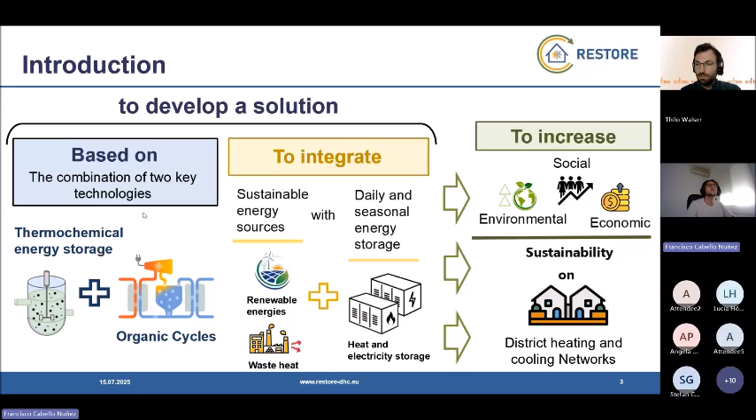So considering that, what we define in our project first of all is what we call the overall concept. This overall concept, as we will see later, encompasses several potential applications. Here on the screen, you can see the main blocks: organic cycles, and the thermochemical energy storage.

As I mentioned, it's suitable for different applications, so we can take into account different energy sources that can be harnessed by our system, but our system can also provide energy to cover services to different users.

Here in the energy sources, we classify them into three main groups: the high temperature heat group, which includes technologies like high temperature geothermal or concentrated solar, also high temperature waste heat. Then we have the green group, which is the electricity technologies, producing electricity as PV or wind energy. Finally, we have the medium temperature group, suitable for solar flat collectors, geothermal energy, or low temperature waste heat.

All these systems can provide energy, and we use heat pumps that adapt the energy input, electricity, and medium temperature heat to the conditions required by the thermochemical energy storage. Also, in the case that we have high temperature heat suitable for application, we can directly integrate it into a thermochemical reactor.

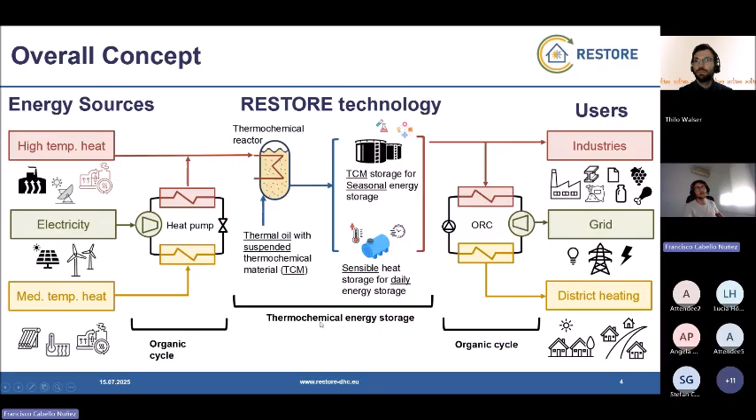So as I mentioned at the beginning, we can identify two main innovative components: one is the organic cycles, and the other one is the thermochemical energy storage. Let's take a look in detail at these components.

Concerning thermochemical storage, the system is based on a reversible reaction, where in the charging phase we apply heat to component A and produce component B and component C. When we want to discharge the system, we recombine these components and have an exothermic reaction where we release some heat.

The idea is that in our concept, we consider a reactor that works with oil and solids in suspension, which we call the thermochemical material, identified here as A or B. To start the process, we have a flow rich in oil, and we mix it in a mixer with product A.

We flow this, it's first preheated, and then used in the reactor. In the reactor, we provide some heat from the heat pump, and we have the thermochemical reaction where we release product C, which in our case is water.

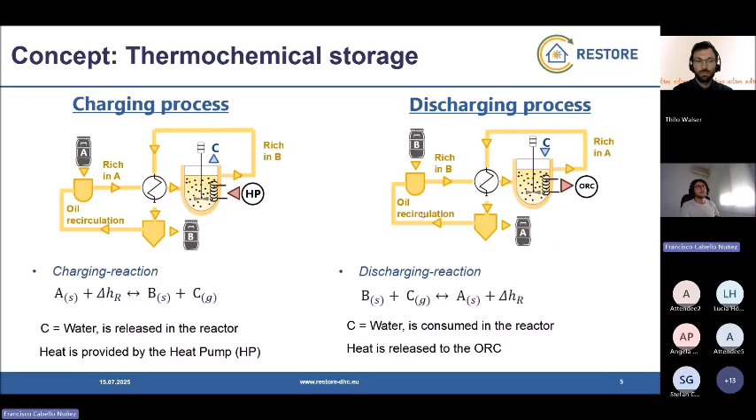Concerning the organic cycles, we also introduce an innovation in that part. The first thing to mention is that we differentiate between two different products. The first one is a small scale system that is based on a fully reversible machine.

When I say fully reversible machine, I mean a machine that is able to operate in charge mode as a heat pump, and when we want to discharge the system, we change the operation mode and the same machine can produce electricity and work as an organic Rankine cycle. This fully reversible machine is based on the use of a screw machine that works as an expander and as a compressor, depending if we are in charging or discharging mode.

Here we define a product around a maximum power input of 200 kilowatts electrical. This solution is expected to be modular, so in the case we have a limitation of maximum power, we can stack several modules to increase the capacity of the final system.

This solution is also suitable for when there is a requirement of compactness, because for example the system must be integrated in a building or similar applications. We can make the modules more compact in case, for example, we base our solution on heat exchangers such as plate heat exchangers.

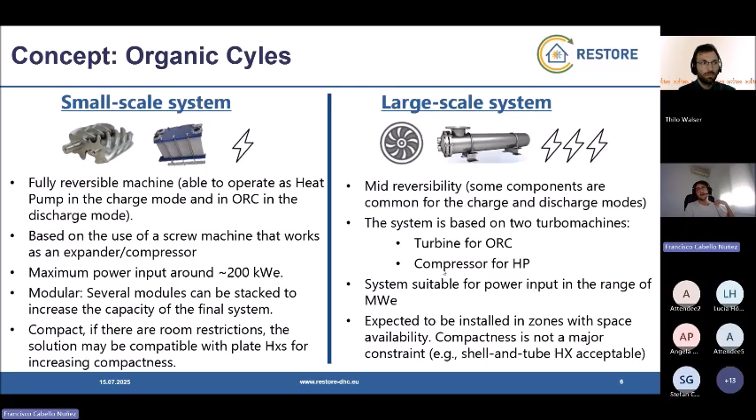So this is very briefly a general overview about the concept. Let me give you some advantages of using this kind of system for storing energy.

The first advantage is that, in difference with other systems like batteries or other energy storage services, we can provide and store energy in both forms, electricity and heat. This is a great advantage as it allows us to integrate different clean energy sources, for example waste heat, but also electrical and thermal renewable technologies.

The second point is related to the previous slide: our concept is highly scalable. For example, in the range of small applications we can use our modular product that can be stacked in different modules in case we need to increase capacity, and in case we need very large scale applications, we can move to the other concept, which can be applied to larger plants or industries with high consumption.

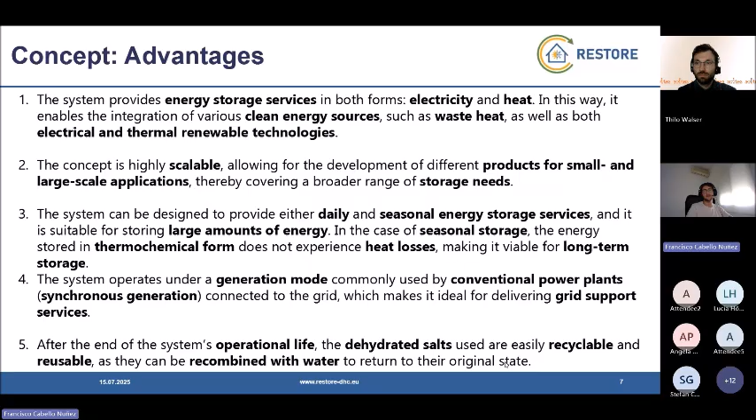And the final point to be remarked, especially when we talk about seasonal energy storage applications where we need a lot of material, is that the material we are focused on as a thermochemical material, when we reach the end of the system's operational life, these salts, these TCMs, that are dehydrated salts, are easily recyclable and reusable. When they are recombined with water, they return to their original state. So we can even think of reselling this solution in the market.

As I mentioned before, there are a lot of options in our framework to connect the RESTORE system, considering different energy sources and different users, but I will try to give you a general overview of the main applications of this system. Here I define 4 important groups. The first one related to the decarbonization of the industrial sector, then the provision of grid stability and ancillary services, the enhancement of the dispatchability of renewable energy sources, and finally thermal energy supply for residential consumers. Let's see in detail some of these main applications.

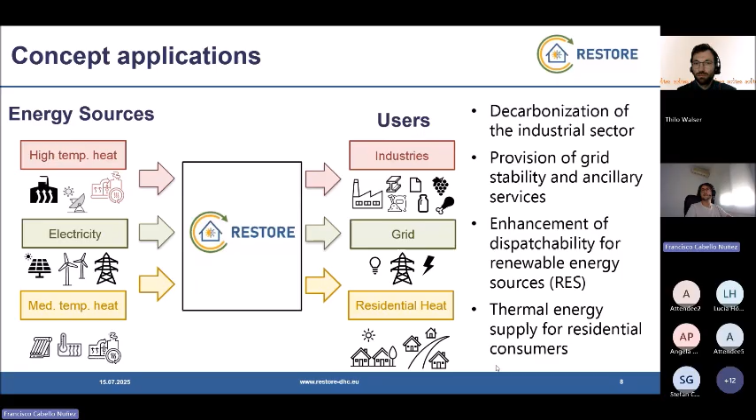First, for the decarbonization of industry, we identify 2 main groups. The first group is the industrial sector that works with higher temperatures, and in that case, RESTORE will be directly connected if we have industrial waste heat at a high enough temperature to run our thermochemical energy storage. And when we want to discharge the system, we can provide high temperature heat for the industry, or, which we mark as optional, if there is district heating close to the industry or we intend to produce electricity, we can also add the Organic Rankine Cycle of RESTORE to produce some electricity or some heat that is provided to the district heating.

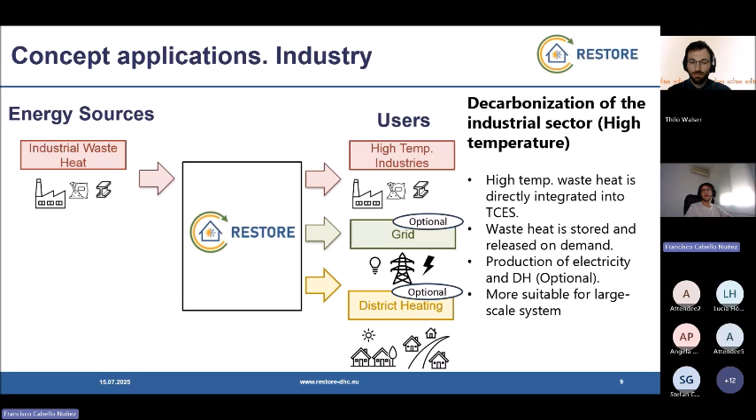And for this solution, considering that high temperature industries normally have high capacities, high thermal output and high thermal energy input, we consider the large-scale RESTORE system more suitable for this application.

The other group related to the decarbonization of the industrial sector are industries that work with medium temperature. In that case, if the industrial waste heat is at lower temperatures, we will need the heat pump, which consumes some electricity. So our heat pump will exploit the industrial waste heat and also some electricity, either from the grid or from a renewable energy technology that matches quite well with the profile of the industrial waste heat. That way we can reduce the buffers and increase the competitiveness of our system.

And we store the energy, and when the energy is demanded, we can deliver it either as high temperature heat for the industry directly, or, as in the previous case, we have the optional case of producing some electricity and some heat for residential applications. In that case, we also consider the large-scale system more suitable, as industry normally works with higher capacities.

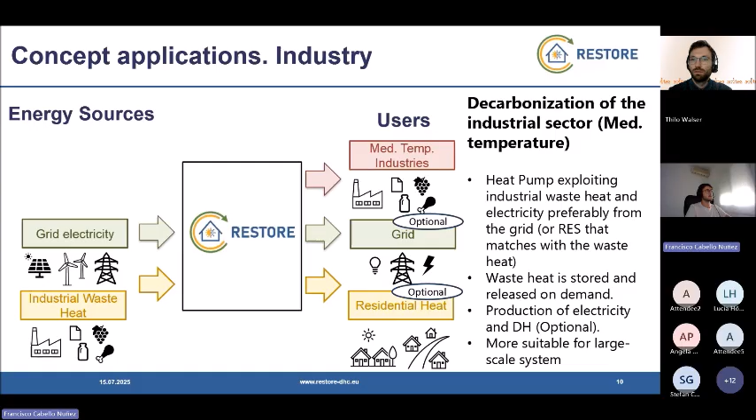The next application is supporting the grid to provide stability and ancillary services. In that case, the RESTORE technology is directly connected to the grid. We use the heat pump to consume electricity when the grid is in a period of high production and low demand, and we store this excess energy. To run the heat pump we couple it to a medium temperature renewable technology, such as solar, which matches quite well with the periods of excess energy on the grid, because solar thermal energy matches quite well with PV, which is normally what saturates the electricity grid.

But here we can also include, for example, geothermal energy, which has a flat production, and in that case we can exploit the RESTORE heat pump when it's necessary for the grid. When there is a period of high demand and low production, we can discharge our system to provide as much electricity as possible. This solution can be suitable for both large-scale storage and small-scale modules, depending on the grid energy needs and the specific locations. This is something that the grid must define.

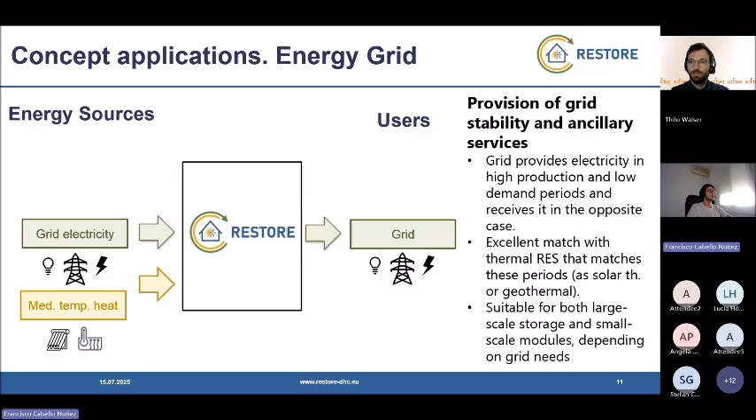In case they need large capacities, we can go to the solution based on turbomachinery. In the case they only need small modules to increase the stability of the grid, we can use the modular solution. Quite related with the previous one, but in that case, the Restore solution can be directly connected with the renewable energy source that produces electricity.

In that case, the Restore system is not connected to the grid, it is directly connected to the renewable energy plant. And in that case, it's quite important to have a good match between the technology that provides electricity and the technology that provides heat. For example, in the case we want to provide dispatchability to a PV plant, an excellent combination could be the solar flat collectors that also harness the global irradiation. And in that case, both technologies have a matching production.

Or we can use wind energy combined with geothermal. In that way, we can avoid excess of electricity and avoid curtailments of this type of plants. And we will store the energy during high production periods and then deliver it when the demand is quite high. Also in that solution, we have the optional case of producing only electricity, or also providing heat services to district heating or small buildings, depending on the case.

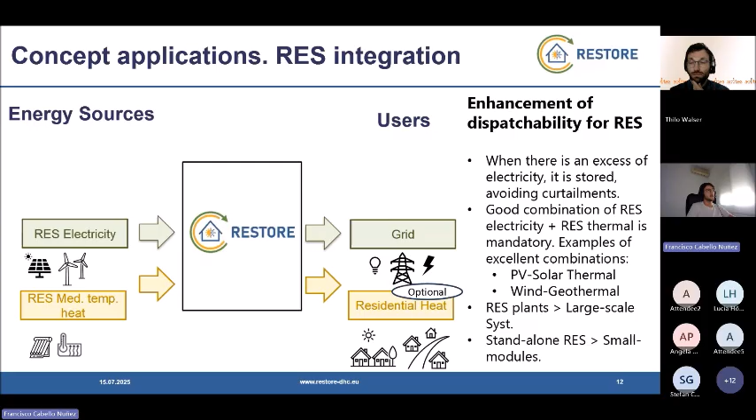As for this case, both the large scale system and the small modules are suitable depending on what we have in mind. If we have in mind large plants, we must base our solution on the large scale system. But if we have in mind standalone solutions that are not connected to the grid, and we want to operate it as a standalone system, we can connect our small modules.

And the final application is focused on providing mainly heat to buildings. In that case, we are talking about the small scale modular solution, and we will allow, for example, buildings to reach zero emission or close to zero emission based on the use of our Restore solution. So for example, in this kind of building, we can connect our modules to exploit some electricity produced by PV, and also harness the medium temperature heat from solar flat collectors.

Or if the building is, for example, a university and it counts on a data center that has waste heat, this can also be harnessed by our system. We store the energy when we have an excess, and then we produce mainly thermal energy for the building consumption, but also some electricity production that could cover part of the electrical building consumption.

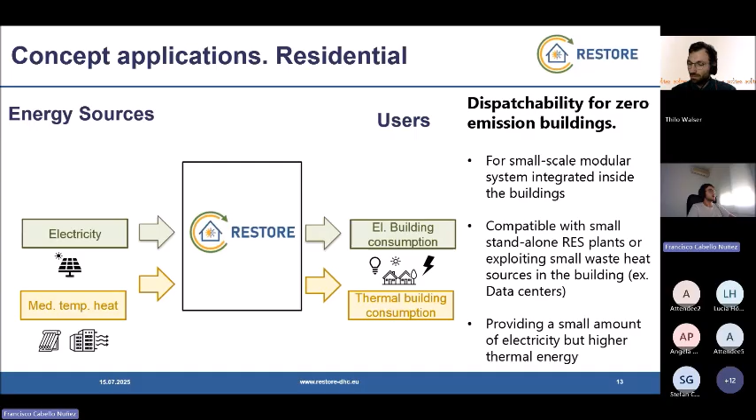And I think that's all from my side. I hope to have given you a general overview of the concept and some details of potential applications. At the end of the session, I will be glad to answer your questions. So thank you very much for your attention.

Yeah, thank you, Francisco, for your presentation. It's very interesting and shows well the different applications of Restore. So we will now continue with the next presentation. It will be about the social sustainability assessment of Restore, presented by Angela Hahn from the Prospex Institute.

Angela has studied social work in her bachelor and intercultural conflict management in her master. At Prospex Institute, she's responsible for coordinating international research and innovation projects, and her expertise lies in the social dimensions of sustainable natural resource management. She's particularly focused on qualitative research methods and stakeholder engagement. So happy to have you here, Angela, and the stage is yours.

Thank you very much, Thilo, for the introduction and for the invitation to present the social sustainability assessment today. Let me quickly share my screen. Good afternoon, everybody, and welcome to the presentation of the Restore Social Sustainability Assessment. I will give the presentation on behalf of my team at the Prospex Institute. We are mainly responsible in the Restore project for the stakeholder engagement part, and one of our tasks is also to work on the social sustainability assessment.

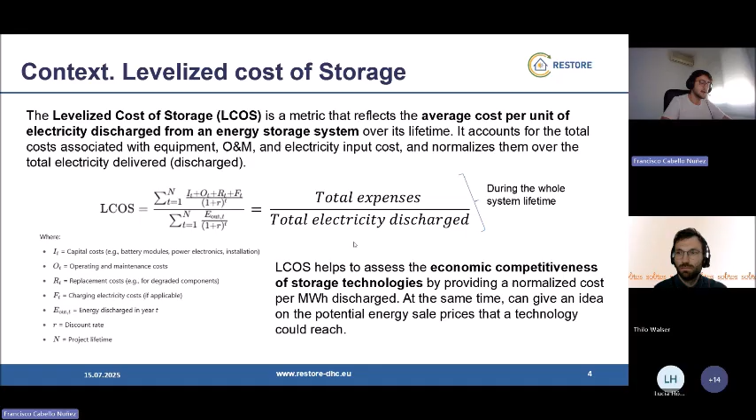But there is a particularity of Restore that must be remarked. If we recall the previously described concept, the Restore system not only consumes energy in one form, electricity or heat, it consumes energy in both forms, electricity and also heat. And at the same time, it is able to deliver energy in both forms, as electricity or as heat. So this particularity has to be kept in mind for this analysis.

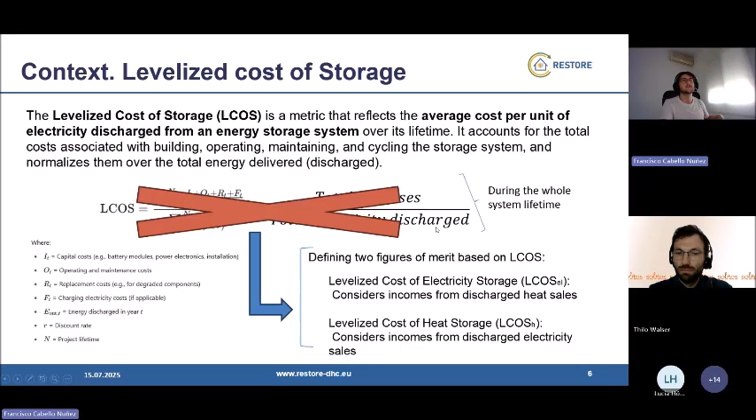So coming back to the previous slide, in our case we are not focused on the levelized cost of storage. We are focused on two different figures of merit. On the one hand, we define the levelized cost of electricity storage for our system, and for this calculation we consider that we obtain some incomes from the sales of the discharged heat. And when we want to estimate the levelized cost of heat storage for our system, we consider incomes from the discharged electricity sales. In that way, we define these two figures of merit for our system, considering its particularities.

So what's the methodology that we follow? First, we are focused on the definition of the CapEx, the investment cost. For the estimation of the CapEx, we have defined correlations based on literature and also on the feedback of the industrial partners to estimate the cost of the main components of the Restore solution. For example, here we have a correlation associated with the non-reversible organic turbine, and we calculate a base cost, and depending on the correlation, we update this cost considering the CEPCI index.

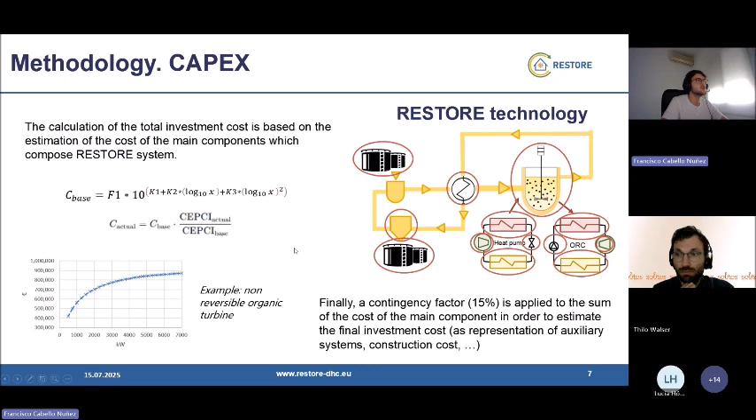We use this procedure to estimate the cost of the main components of the system: the storage tanks, the heat exchangers, the reactor, the turbine, heat exchangers of the organic cycle, and so on. And in the end, we have a summary of the cost of the main components of Restore. Finally, as a simplification, we consider a contingency factor of 15% applied to the sum of all these main component costs to estimate the final investment, representing auxiliary systems such as the control system or sensors, piping, and also costs associated with construction. With this simplification, we increase the cost slightly to take these concepts into account.

So once the CapEx is defined, we move to the second part of the financial model, which calculates the cash flow for each year over the plant life, which is estimated at around 15 years for our first evaluation.

Once these cash flows are estimated in a model implemented in Excel, the model concludes the relevant economic indicators: the net present value, the internal rate of return, and finally our main outcome of interest, the levelized cost of storage for electricity and for heat.

Here I bring also some considerations taken into account in our model. I won't go very deep into details since we are tight on time, but just to mention that for the inflation rate, our system allows us to consider a variable inflation rate, but in our first cases we consider it constant. It also allows us to consider degradation of the plant, assuming that the percentage of energy produced in the last years of the plant is lower. So we are able to modify this kind of parameter. For our first estimation, we consider low degradation.

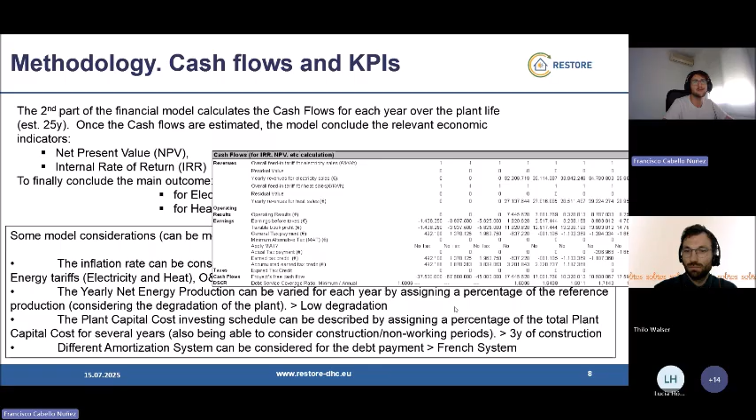And then we can also choose the amortization system, and in our case we have chosen the French system. Well, we have our Excel that is plenty of rows and columns, so I'm not going to go into detail with the Excel. Just to mention that the procedure we follow is the next one.

In the Restore project we have the IPSEGO platform, a simulation tool where we implement the use cases previously mentioned. In these cases, we conclude the energy balances and the size of the different equipment. So we integrate into different datasheets in this tool the correlation I mentioned before in order to calculate the cost of the different components, and then this information is used in the Excel tool I mentioned before.

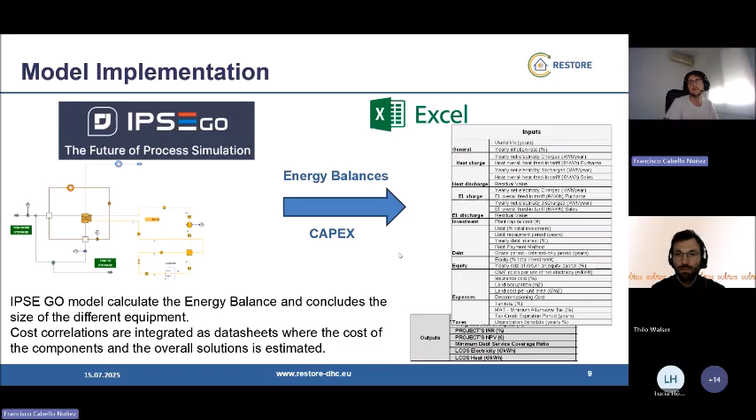So we analyze and receive the energy balances, which mainly means electricity consumed, electricity produced, heat consumed and heat produced, and also the investment cost. Finally, our Excel concludes with the levelized cost of storage and levelized cost of heat, and also other ratios such as the internal rate of return and the net present value.

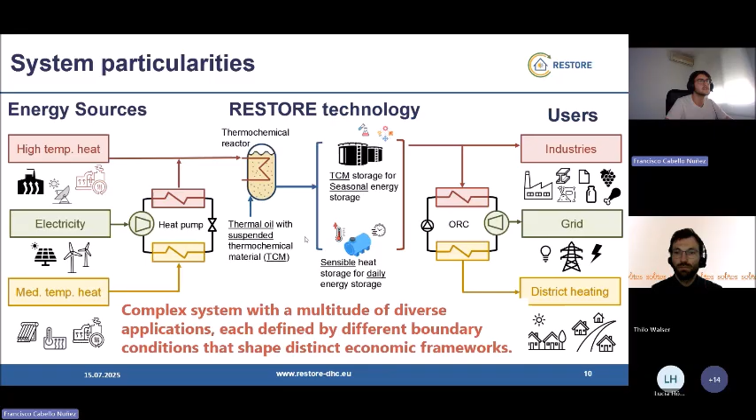But considering that we have developed this model, it's important to mention that, as we've seen in the first session of this webinar, the Restore system is quite complex with a multitude of diverse applications, and each application sets different boundary conditions that shape totally distinct economic frameworks. It's not easy to deal with that. So what's our approach in the Restore project? Well, in the Restore project, we define virtual use cases, already mentioned, that are, at the end, a virtual implementation of the Restore project concept for specific gas facilities over Europe.

In these use cases, we apply this economic assessment, concluding economic data such as the investment cost, the annual cost, the cash flows, and finally the levelized cost of storage for heat and electricity. There are 6 different use cases considered in the Restore project. You can check all the information on the use cases on our website, but mainly they consider different sizes, different energy sources, and different users.

So with these 6 different use cases, we expect to have different scenarios to conclude the competitiveness of Restore in different applications. But unfortunately, the information on these use cases is not ready yet; it's not finished. We are still dealing with simulations, so this economic assessment cannot be applied yet.

But for this presentation, and to try to give you some numbers, we have defined a general case and have some preliminary conclusions and preliminary results related to the economic assessment. So I want to bring that here.

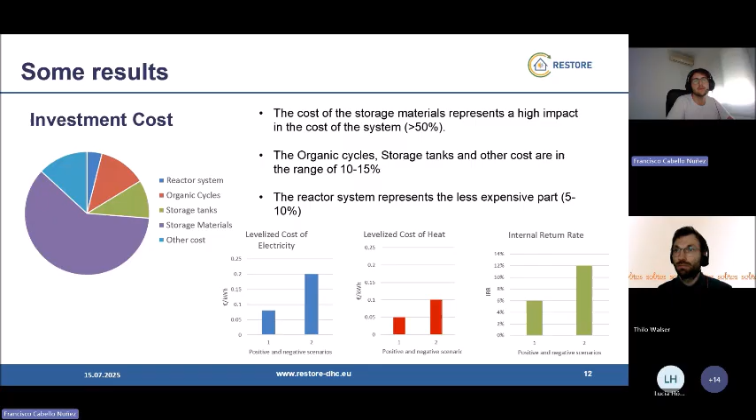To bring some conclusion to this presentation, I'll summarize quickly since we are out of time. An extensive economic model has been adapted and implemented to estimate the main economic indicators, and that's quite good because now we have the tool to estimate different scenarios.

It's also important to mention that these first results show the relevance of the cost of the storage material in the economic assessment, and this variable represents a high impact on the final results. So these values must be considered and taken into account carefully. A potential reduction in the cost of the storage material will improve profitability and maximize the competitiveness of the final Restore system.

The next steps are to carry out the economic analysis for the 6 different use cases. I invite you to keep tuned for information when we finish evaluating these 6 use cases, and also for the final outcomes confirmed by project completion. I hope I've given you some details on what we're working on, along with some very preliminary conclusions and a general overview of the economic assessment.

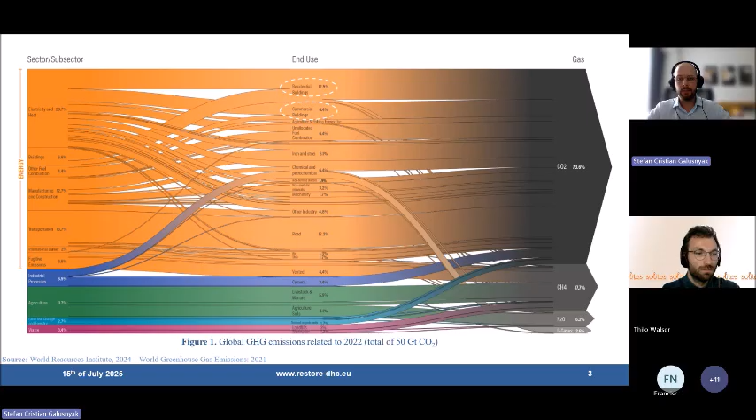Regarding the LCA methodology, life cycle assessment consists of 4 distinct stages according to the International Organization for Standardization. First, we have the goal and scope definition. Next would be the life cycle inventory step. Third, we have the life cycle impact assessment. And last but not least, we have the interpretation of the results.

Regarding the goal and scope definition, at this stage it is important to state what is the goal and scope of the intended study. Then we move and we have to state what is the function of the investigated system. For example, the function of the system could be to generate electric and thermal power. Next would be the definition of the functional unit. The functional unit serves as a reference both for the input and output streams, and it is also used to easily compare different processes or different products.

Finally, we have to define the system boundaries. Here we have to clearly state which are those processes that we take into account when performing such an LCA study. Depending on which processes we consider, our study may be classified either as cradle to grave, if we take into account processes from raw materials extraction, materials manufacturing, the main production process, its use stage, and also its end-of-life treatment. However, if we go from cradle to gate, that means we should take into account processes from raw materials extraction, materials manufacturing, and the main production process. Another option would be to go from gate to grave, so it means that we only take into account the use phase and the disposal, the end-of-life treatment. Or we may focus on a gate-to-gate evaluation, which means that we only look at the main production process.

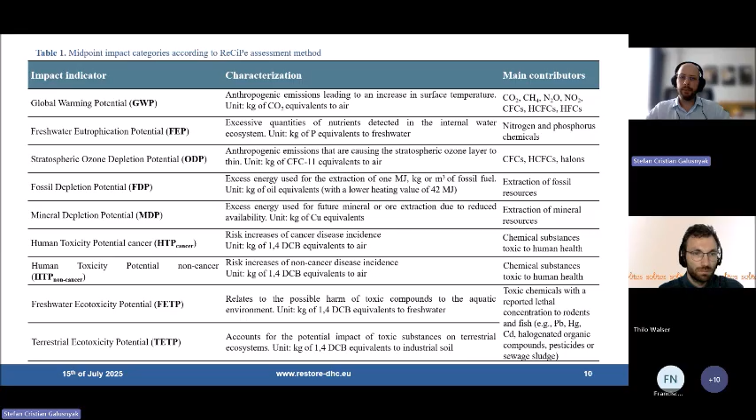Here we have a description of several midpoint impact categories and the main impact contributors in each case. We have the global warming potential, which is characterized by anthropogenic emissions leading to an increase in surface temperature. As main contributors, we have carbon dioxide, methane, chlorofluorocarbons, and so on. I would also look to the human toxicity potential category, which is divided into human toxicity potential cancer and human toxicity potential non-cancer. Those two are characterized by risk increases of cancer and non-cancer, respectively. As main contributors, we have chemical substances toxic to human health.

Okay, so that was all I have prepared about the methodology. Now let's take a look at the RESTORE prototype.

First of all, this study is a cradle-to-grave LCA analysis, as we took into consideration raw material supply up to the main charging and discharging processes, and we went downstream for waste disposal.

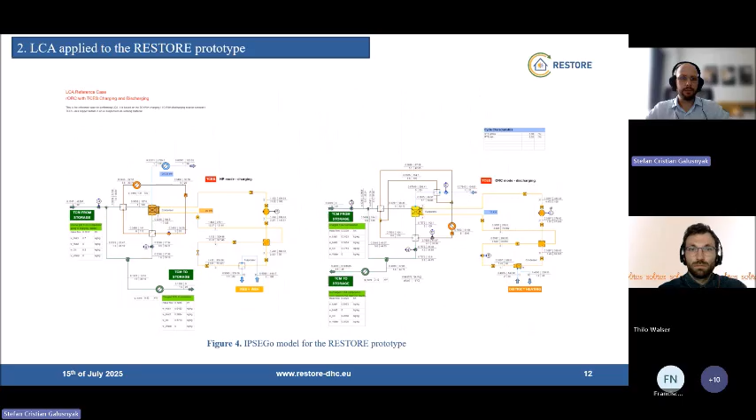Afterwards, we have the inputs and the outputs. We should carefully select the streams when defining the input and output streams, as they might significantly influence the outcome of the analysis.

One very important aspect regarding the RESTORE prototype, and I'm going to emphasize this later, is the LCA plan for the RESTORE prototype construction.

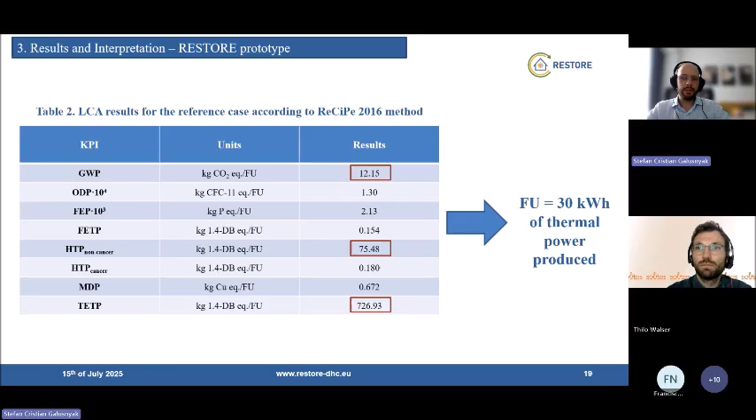As can be seen, the largest impact scores are registered in terms of global warming potential, human toxicity potential non-cancer, and also terrestrial ecotoxicity potential. In the next slides, I would like to take a look at those three impact categories.

So in terms of GWP distribution for the overall system, we may see that the oil production, so the charging system, has a contribution of 9.51 kilograms of CO2 equivalents, while the Novec production contributes 5.42.

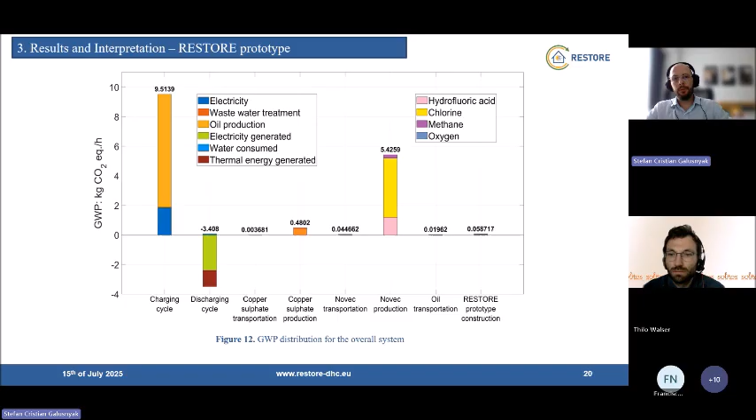Now, if we take a closer look at those two subsystems, we may see that the oil production has the largest contribution in the charging cycle. The discharging cycle exhibits a negative impact due to the electricity and thermal power generated, while for the Novec 649 production, we can see that chlorine exhibits the largest impact.

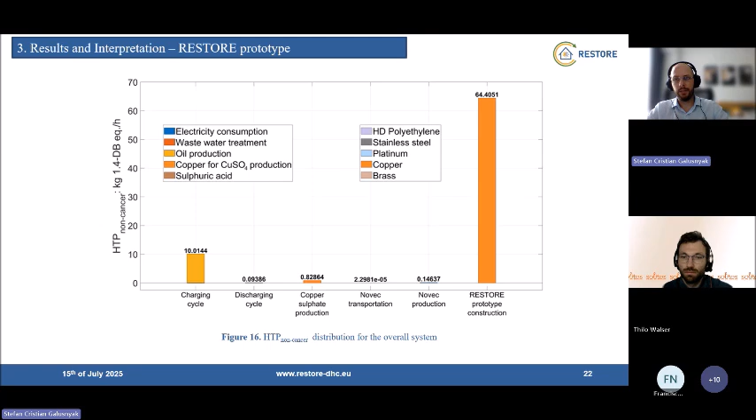Same when looking at the human toxicity potential non-cancer distribution: one can see that the largest impact comes from the RESTORE prototype construction, followed once again by the oil supply chain.

Going into further detail, it can be noticed that copper production exhibits the largest influence when referring to RESTORE prototype construction.

However, it is important to state that it's not the RESTORE technology itself. It is more related to how copper is produced, since we use copper for wires and so on. So it's not the RESTORE technology itself, it is more about how copper is produced, how you produce stainless steel, and so on.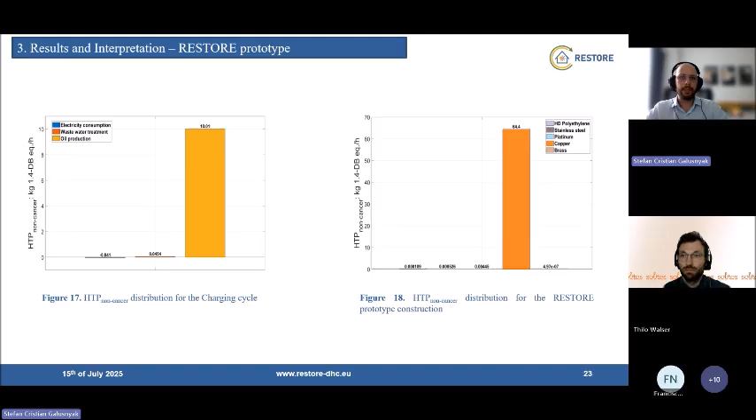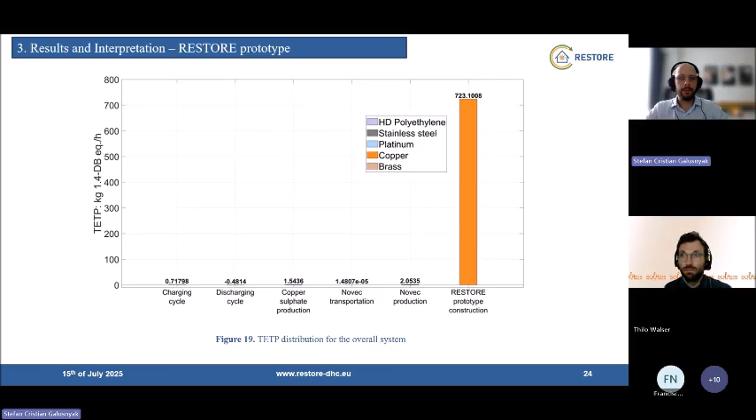Okay, same thing when looking at the terrestrial ecotoxicity potential distribution for the overall system. We can see that the RESTORE prototype construction, thus the way we obtain copper, stainless steel, and so on, exhibits the largest impact. We have copper production once again for the RESTORE prototype construction, while when looking at the Novec 649 production, we may see that hydrofluoric acid, followed by chlorine, rank as the first and second contributors.

Now, to sum up, I would like to say that global warming potential, human toxicity potential non-cancer, and terrestrial ecotoxicity potential exhibit the largest environmental impact scores.

When looking at the charging cycle, the oil supply chain ranks first with over 80% of the total impact score. Therefore, any improvements in this direction would considerably lessen the environmental burden. About 85% of the human toxicity potential non-cancer impact may be attributed to how copper is produced.

This is because copper is further used for the Restore prototype construction, and the main construction-related risks are associated with the upstream production of the materials, copper, stainless steel, and so on. So it is not related to the Restore technology itself.

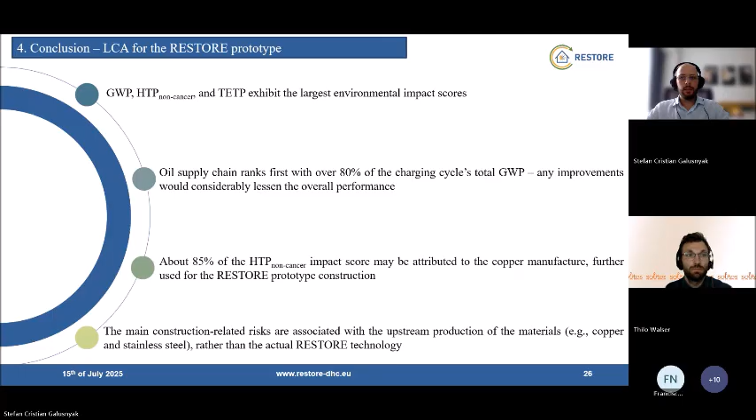Thank you, and I hope there are more things that you better understand now about LCA than at the start of this meeting.

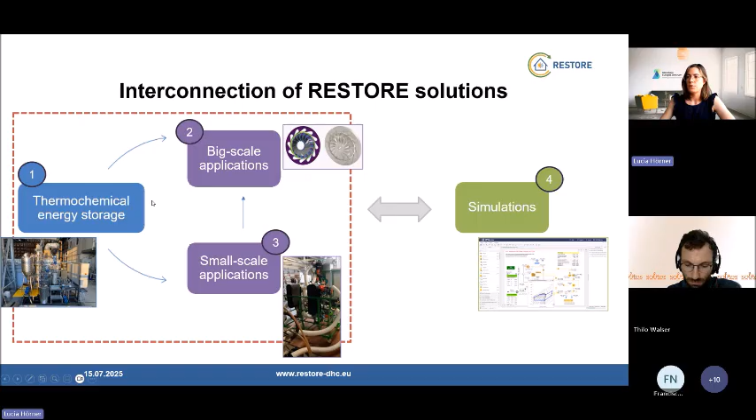So, the thermochemical energy storage design - I have here always the kind of value proposition that our solutions are offering, and they go hand in hand with the applications that were presented by Francisco earlier. I'll keep this introductory part short and focus more on the aspects that link to who will be customers, who will be key partners in this process. For this result, we are targeting energy-intensive industries, renewable energy producers, and utilities, grid and district heating and cooling network operators. What's quite special here is that we also see engineering, procurement, and construction companies, as well as energy service companies, somehow as entry points for reaching further customers and other partners relevant for the further development. Bringing this result closer to market will be heating, ventilation, and air conditioning equipment manufacturers, as well as manufacturers of energy storage systems.

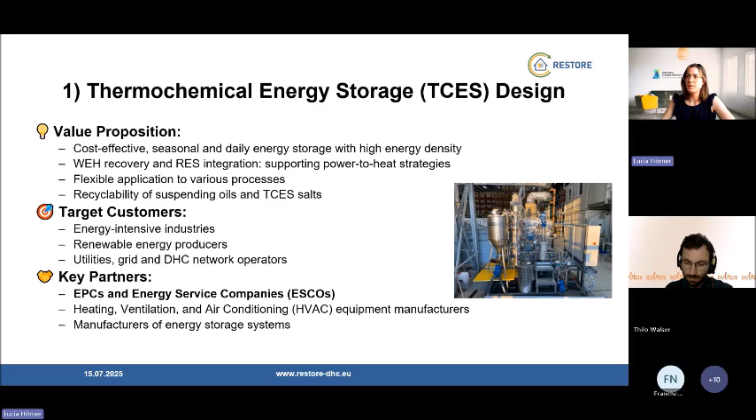Regarding the market size for this result, we are targeting the market of thermal energy storage, specifically the one for seasonal and long duration applications. This market has been projected to be at 4.3 billion euros 2 years ago, and is projected to be around 8 billion euros in 2030. However, it's quite difficult to get concrete data for the thermochemical energy storage market specifically, which is a share of this market. So the number I'm showing here is pretty much the market for 3 different types - thermochemical, sensible heat, and latent heat. It's a bit difficult to get concrete data.

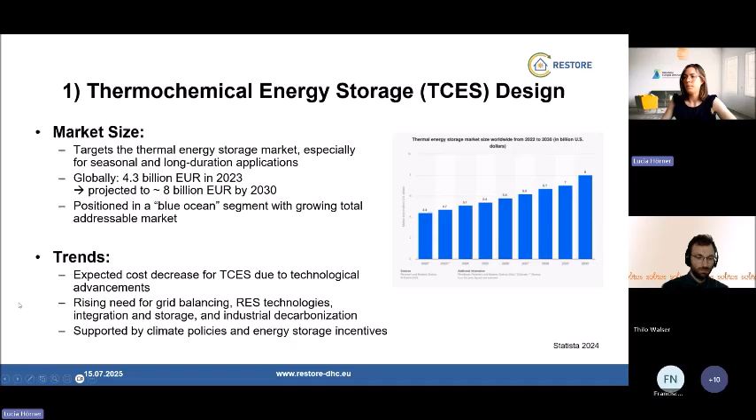But some studies suggest that the share for thermochemical energy storage among these 3 is the smallest. However, it's really continuously growing, and as we're expecting cost decreases for thermochemical energy storage due to technological advancements, this will for sure further drive the market increase. There's a rising need for grid balancing, renewable energy storage technologies, as well as integration and industrial decarbonization that, together with climate policies and energy storage incentives, is very strongly providing a case for our technologies that have been developed.

Then we have the large-scale reversible thermodynamic process. So this large-scale application is the most effective for really maximizing renewable energy and waste excess heat utilization. Here, target customers are district heating and cooling network operators and energy-intensive industries. And our key partners here are Turboden, who is a partner in this project, as well as district heating and cooling utility firms, industrial equipment manufacturers, and also technology integrators.

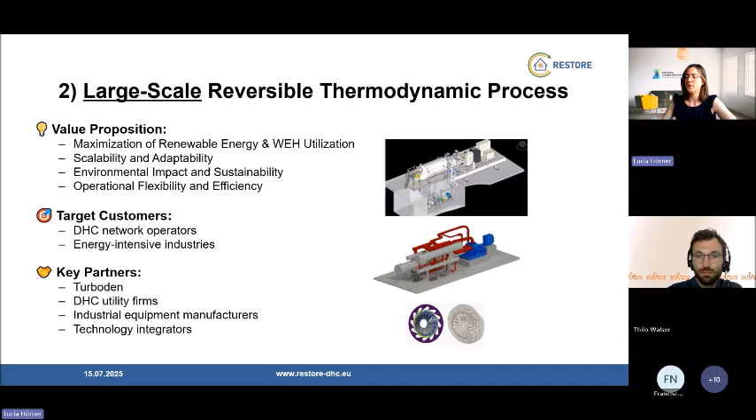What I can mention here is that it's quite adaptable and flexible. These are some terms that you'll also see for the small scale, as these are really value propositions that are not just linked to an individual result, but something coming up across all the various restore technologies.

In terms of market size, there's a large but immature market for decarbonizing district heating and energy-intensive industries. About 2/3 of the temperature demand is for district heating applications, while about 1/3 is for temperatures higher than 100 degrees centigrade. And this is relevant for industrial process heating.

We found some information that approximately 245 million tons of oil equivalent of waste excess heat is available for recovery in the EU. This is nearly equal to the EU's total energy demand for heat and hot water in residential and service sector buildings. So just to put this a bit into context.

And also here, the EU decarbonization policies, urban development, and sustainability goals are strongly driving the market for this type of application, and also the adoption of this technology. It's influenced by equipment costs, of course, energy prices, and the risk tolerance of the industrial sector.

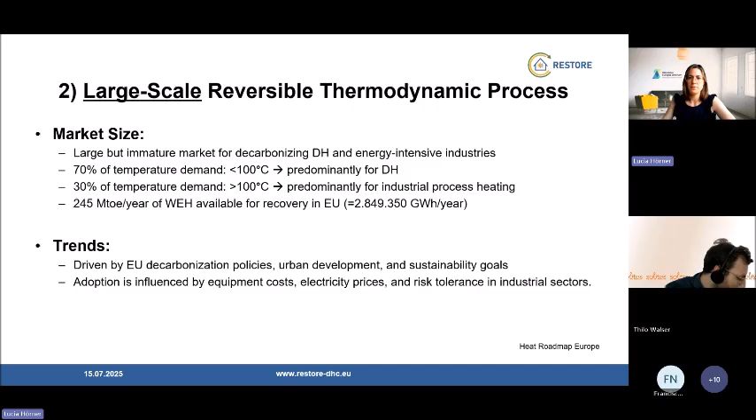Our small-scale application: here we're targeting educational and research institutions, local utilities, and small municipalities, as well as industrial parks and technology campuses. Our core partner here is Enerbasque, and other partners needed for the development and cooperation are academic and research institutions, local municipalities, and technology park managers. A strong buyer-supplier relationship is also important, as we're still developing the results together with the partners with whom we're cooperating.

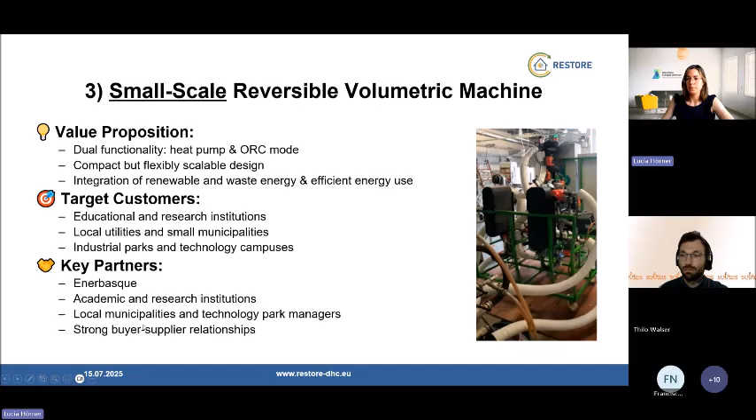So in terms of market for this result, we have about 1,500 higher education institutes with engineering programs in Europe, just below 400 technology centers, and cities of a size where this type of solution could be applied number around 60,000 in Europe. So this is the market for our small-scale application as we see it right now.

We have a rapid growth in renewable energy technologies, and also strong demand for flexible small-scale systems that can fit the needs of smaller towns, where the energy can then be managed locally.

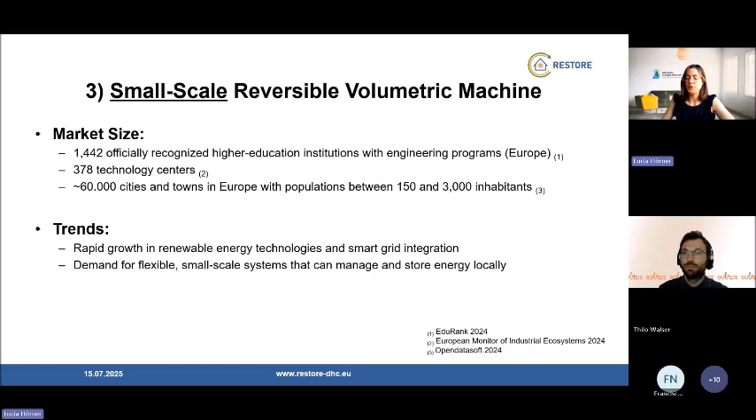And our fourth key result from the project is our simulation tool, the virtual tool, which is built on the restore process models based on restore technologies. Key customers we're addressing are engineering, procurement, and construction contractors, district heating and cooling operators, renewable energy system developers, and also smaller technical consultants, because of the various added values this simulation tool offers. It allows virtual simulation without the need for physical piloting based on the restore technologies. So it helps to reduce costs, mitigate risks, and have very effective planning.

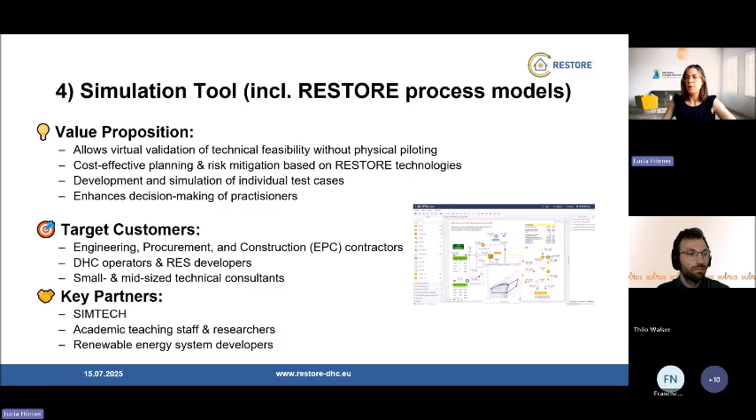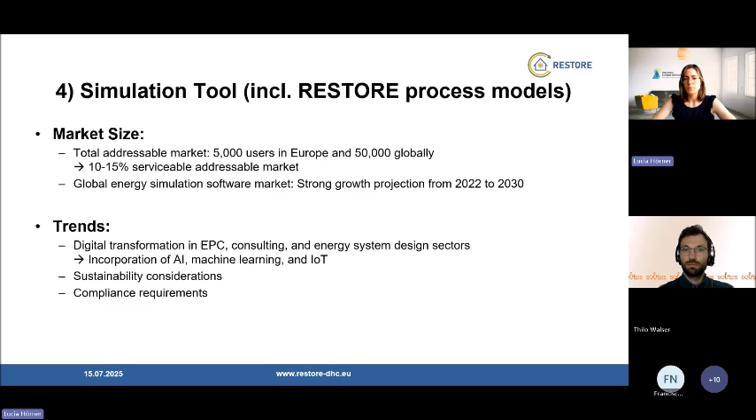Our key partner here is SimTech, and academic teaching staff, researchers, and renewable energy system developers are also relevant for further cooperation. Our total addressable market in Europe is about 5,000 users, while we expect 10 to 15% is realistically servable. We see a very strong increase in the simulation software market, influenced by the digital transformation of the EPC, consulting and energy system design sectors; compliance requirements and sustainability considerations also strongly influence this market.

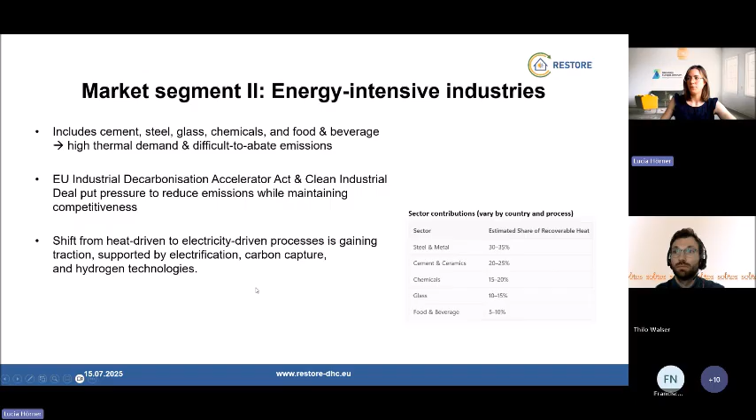For energy-intensive industries, which include, for instance, cement, steel, glass, chemicals, food and beverage applications, we have high thermal demand. On the other hand, it's difficult to reduce emissions. We see in the overview that steel and metal, as well as cement and ceramics, are the largest among these sectors. We also see a shift from heat-driven to electricity-driven processes, supported by electrification, among others.

In terms of waste excess heat, more than 300... We have approximately 10% of the EU's total energy consumption in industry which is available right now for energy recovery or heat recovery. So that's a large share of what is already available today.

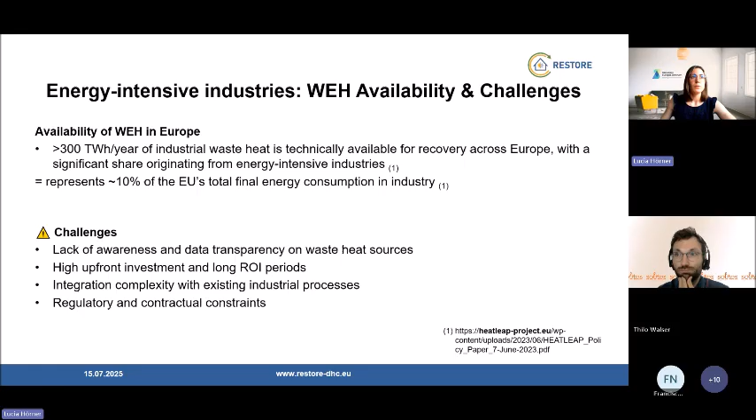However, challenges are the lack of concrete data on the waste heat sources, also awareness in some cases, high upfront investment costs, the long payback periods I mentioned already, regulatory aspects, and integrating new systems into the existing plant processes.